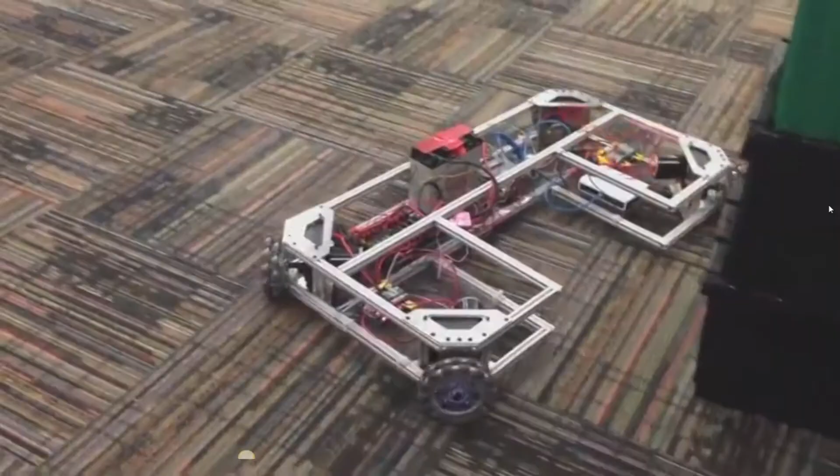If you just joined our series, we are creating this rolling robot chassis. In this episode, we are going to create the mounting plate for our motor and wheel assembly. Using top-down modeling, we will design the mounting plate with our motor model. This will ensure perfect hole alignment.

Right-click on the subassembly and select Open. Now we have isolated our motor corner. To create the mounting plate, click the drop-down under Insert Component and select New Part. I click the back face of the transmission housing.

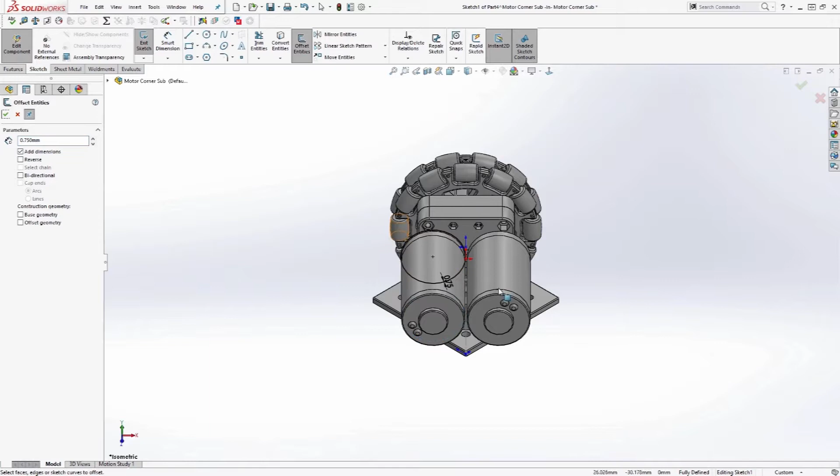First, I choose Offset Entities to create a clearance cutout around the motors. I'll use 3/4 mm as the offset distance. Next, select the outer edges of the motors to create the cutouts. Using a section view, remove the motor housings from the view. Go normal to the sketch.

Let's work on the cutout for the encoder bracket next. I select the left edge of the encoder mount, then right-click, select Tangency. This selects all the edges that are connected in tangent. Click Convert Entities. Our selection turns to lines. Repeat this on the other side.

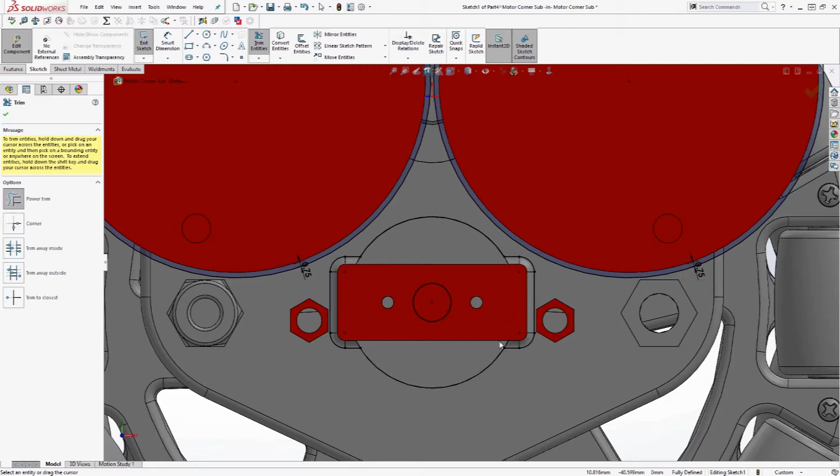Next, select the circular face and convert entities. Use the power trim to clean up this unwanted geometry. Click OK. Now I want to create the plate boundaries. I'll begin with a corner rectangle. The bottom left corner will be coincident to the top of the corner gusset.

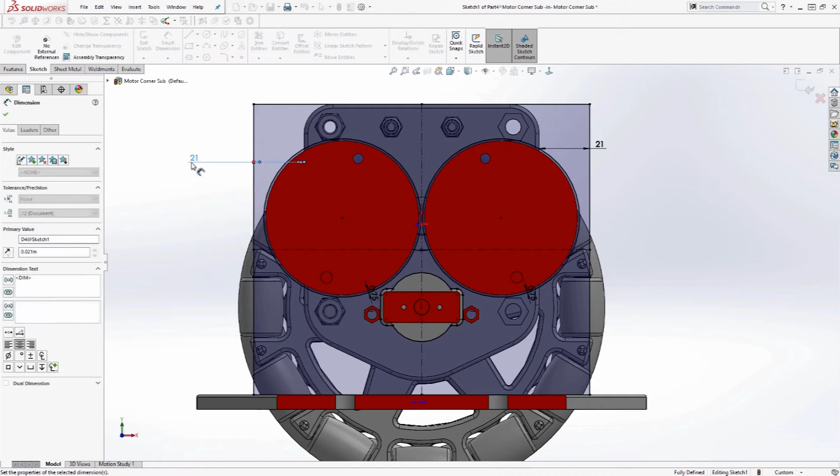We want the motor mounting plate to be nice and compact. I'll add a collinear relationship to the top edges of the rectangle and the motor housing. Using two 21 mm overhangs, I define the plate's width. This gives my 20 mm extrusion a mounting place. My plate is now fully defined.

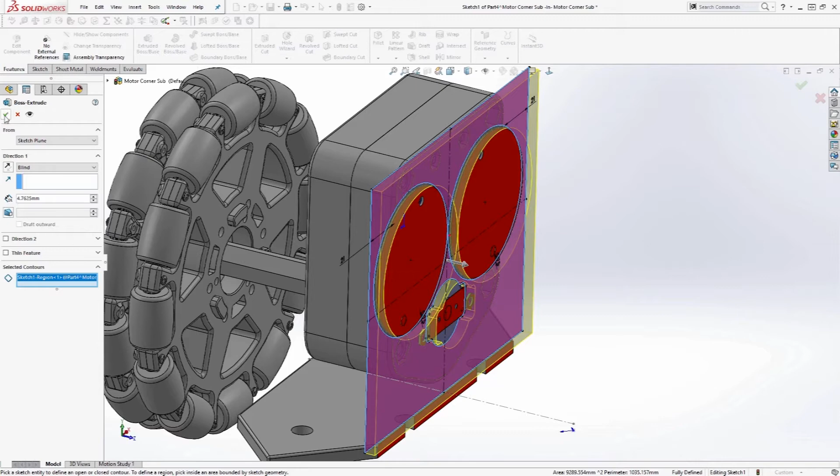I will extrude our rectangular profile 3/16 of an inch. There are 4 closed profiles in the sketch, so make sure the correct profile is selected. I need to add 4 10 mm fillets to the outer corners. I select my first corner to fillet.

By hovering, I trigger the Edge Selection toolbar. Select the option Connected to Start. This picks the remaining 3 edges. Solidworks applies the fillet to all 4 corners. Click on the section view to turn it off.

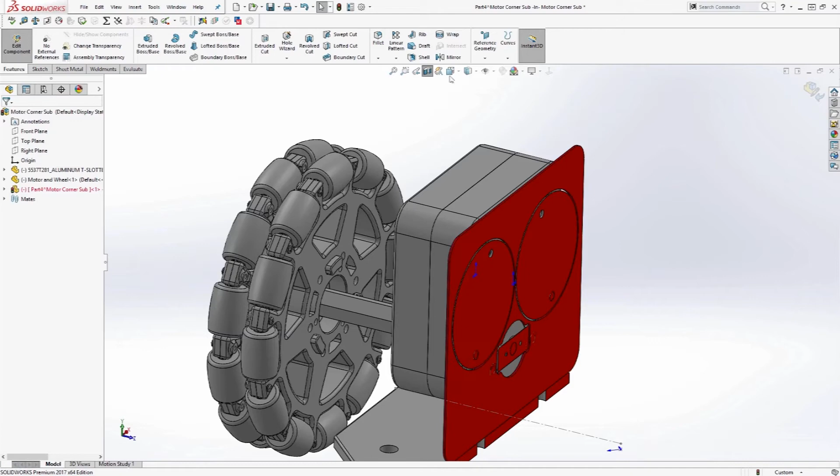I need to add mounting holes to the plate. I pre-select the back face of our motor plate and select Hole Wizard. Tip: by pre-selecting the face, we force our Hole Wizard holes to go through that face. I want to add 4 holes. Use screw clearances for ANSI number 12 screws through the plate.

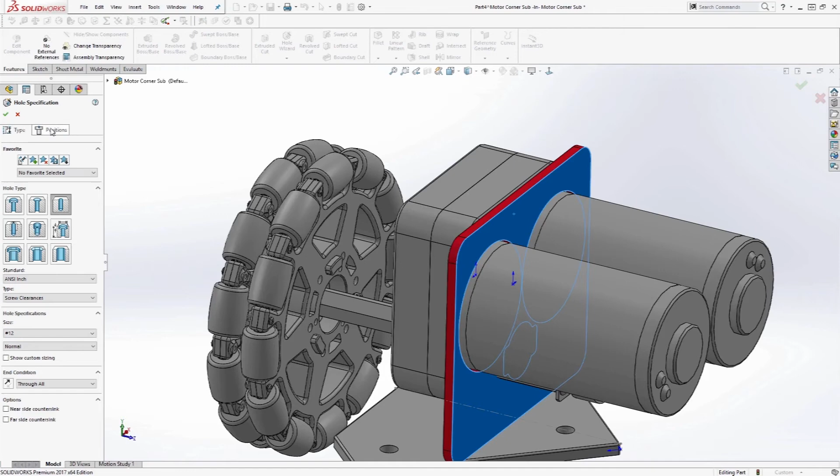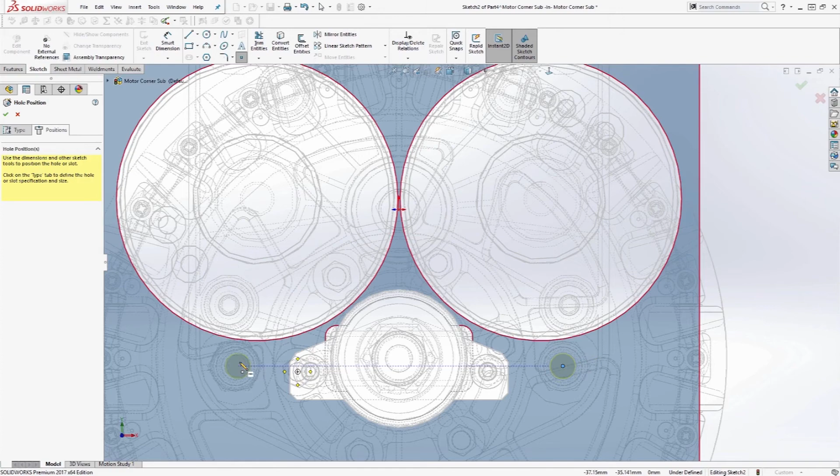Now I select our Positions tab to place the holes. I will switch my view to Hidden Lines Visible to reveal the motor mounting holes. Tip: hover over circular edges to wake up the center points. I place 4 clearance holes. Click OK.

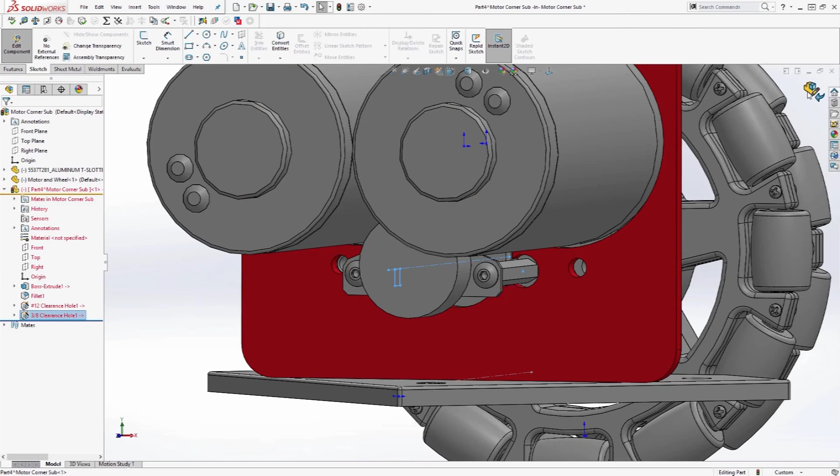Repeat the previous steps to create 3/8 inch clearance holes for our encoder standoffs. Switching back to Shaded with Edges, I can verify my geometry does not have any interferences. Rename the mounting plate and save it to an external file.

Creating parts within an assembly is an effective way to validate your design. When your design is finished, you can confidently begin production. Join me next time as we create our corner uprights. These uprights will be critical for joining the lower and upper frame and mounting our motor plate.